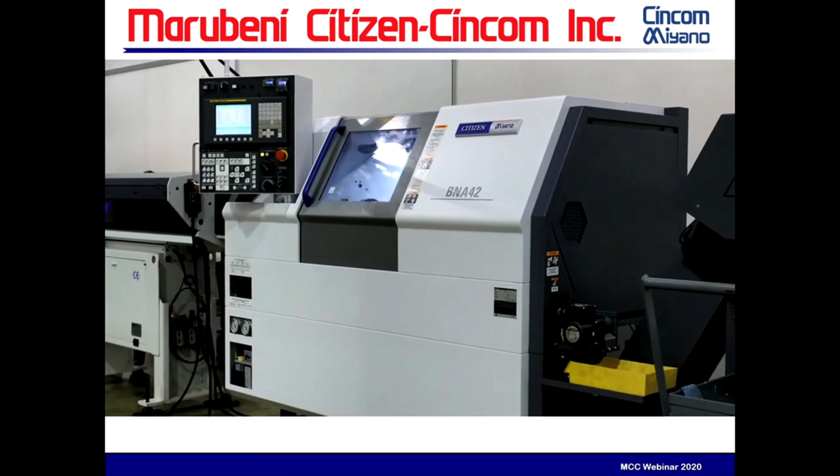This allows us to quickly have hands-on demonstrations or test cuts at various locations, and you don't need to wait for an IMTS or other trade show to see a machine in person if needed. And when you decide to buy, we can quickly deliver the machine you need so that you can start making money as quick as possible. In addition to machines available when you need them, we carry around $15 million worth of spare parts in our USA warehouses, meaning quick delivery if your machine goes down. And everyone knows a machine isn't making money if it's not making parts.

Hi, my name is Rich Miller, and I'm Regional Manager here at Marubeni Citizen-Cincom, and welcome to Tech Days. Today I'm going to be showing the BNA 42S and a little history on Miyano. Miyano was started way back in 1929 making industrial files. If you were a machinist or a skilled tradesperson back in those days, you probably had a file or 2 in your toolbox. In 1948, Miyano created the AL-S25, which was the first automatic cam-operated lathe made in Japan.

Since then, they made very reliable, accurate, heavy-duty machines to run high production. And they sold so many machines that, in fact, they were assembling the machines just down the road here in Wood Dale, Illinois. In 2010, Citizen acquired Miyano, and today it's a product that's made by Citizen alongside our Cincom Swiss machines.

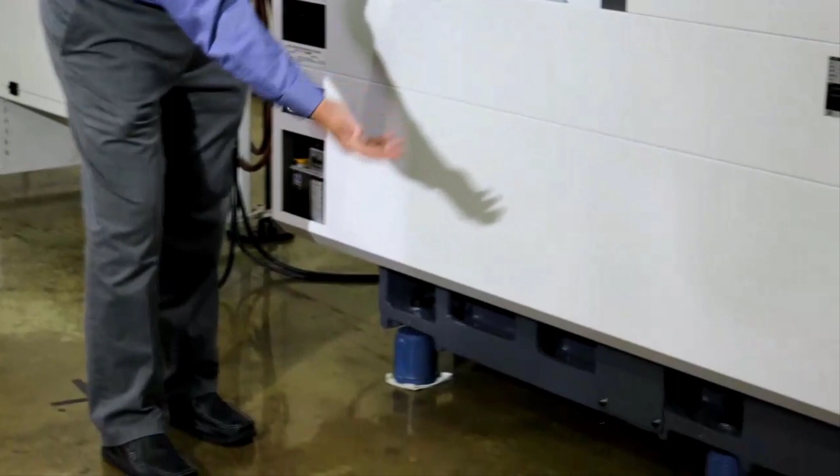This machine right here, you can see the heavy-duty casting base down at the bottom, comes all the way to the front of the machine. Most machines, you'll have a chip pan down there, coolant pan that's easy to pull out, but this has got casting all the way to the front. We have heavy duty spindles to take all that vibration from the bars whipping around. The spindles are made with double angular contact ball bearings at the front for speed and heavy duty cylindrical roller bearings at the back for rigidity.

You can bring that in now. We're going to look into the machine.

As we go over some of the features in the machine, the main spindle is a 6,000 RPM, 10 horsepower spindle with a flat nose adapter on it. The sub spindle is 5,000 RPM, 7.3 horsepower, also flat nose. We have an 8-station turret, and it has half indexing, so we have 16 total positions on the turret.

Each one of the 8 stations are 5,000 RPM, 3.7 horsepower, and 16 Newton meters of torque, which torque is what you need for heavy duty accurate cuts. The machines are box-way design, hand scraped. Miyano's been making machines that way for a long time. That way of making ways creates a machine that will stay accurate and need very little adjustment over a long period of time.

So going on to what is included with this machine, we try and do what Miyano did in the past, which was deliver a machine that has everything included so that you can get up and start running without a lot of extras that you need to purchase later on. So included with this machine, we have the parts catcher that we talked about before. This is the 4-inch parts catcher that would come up and take the part. The parts catcher drops it down to a part conveyor. That part conveyor is included.

We also include the chip conveyor, because you're going to be creating lots of chips with this as it runs continuously. We also include the 2 collet chucks. These are B42 collet chucks that are included with the machine. We also include the Patlite so that you know when your machine is running and not running. Also included is a static tool package.

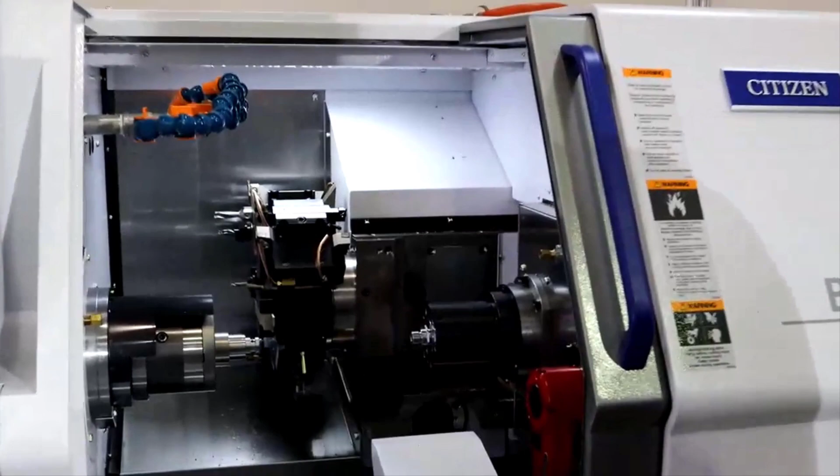So we can go back in a little bit closer to the machine. Included with this is the cutoff tool holder. And then Jinho, can you bring it down? And we include 3 of these double turning tool holders, so you can put a tool holder on the front and the back. So you get 3 of those. Plus you're going to get this knee holder. This is for the half index position. You get 2 of these included. So you can see we have 2 knee holders installed on this machine.

Bring it down 2 more stations. And so this tool holder right here is a triple drill holder. We include 1 of these in the package also. And then we also include 3 double drill holders in this package, and those are not in here. These are live tools, and unfortunately those are not included. You have to purchase those as options.

And then we also include some bushings to get you started, some drill bushings. There's also what they call filler tubes or spindle tubes that support your bar in the main spindle. There's 5 of those included also.

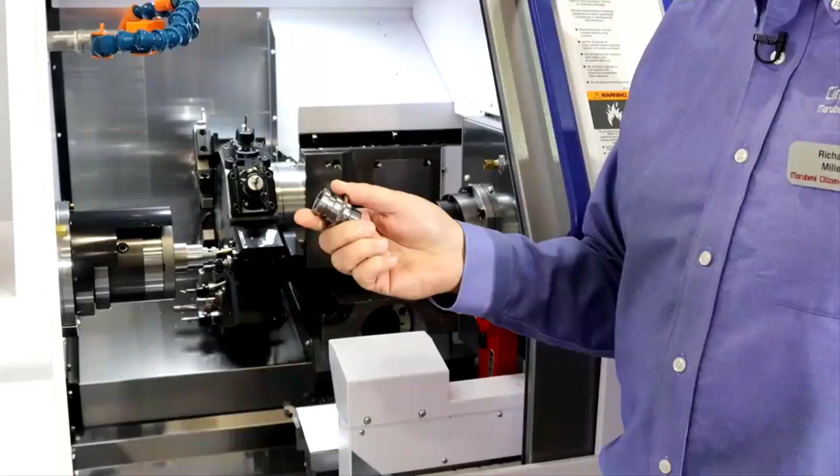The part we're making is a steel part, and what we wanted to show off today on this machine is how much this simple machine could do. So we're having 19 tools in this machine running, and we still have room for more depending on the part. So we're going to show this part running in brass so you can get a closer view of all the tools. So we can go to the tape video of the part.

So here's the BNA42S, same machine. And so here's the double live holder. We're going to index down to that position. We're doing a rough cut on the front side. You'll notice after this rough cut gets done on the main spindle, there's no index. We're just going to move right back to the back spindle. So there was no index time there. We're just right to the next cut.

Next position's coming down, another double tool holder, and this is the finish turn. Again, no index as it's going to go from this position to the front position. Finish turn on the front side. The next tool you'll see coming in here is going to be the half index holder. That's going to have a groove tool in it. Here's the groove tool finishing this.

And now another knee holder, and this one has the threading tool in it. So we're threading here. Coming back, remove all the burrs and a spring pass with the threading tool. Next up is that triple holder, going in with a 1/2 inch indexable drill on the front side.

So this is a bar loader and not just a simple bar feed unit. Bar loader means that we can stack multiple bars in here, and once it finishes one bar and retracts and takes out the remnant, it's going to drop the next bar into place in continuous operation without operator intervention. We have a lot of other bar feeds for our other machines. We have our CAV units for our Swiss machines. We also have other size Miyanos that we have other bar loaders for, and if we have really big stock, we do have some bar feed units.

If your part was a blank and you need some custom automation, we have a full automation department in New England, and they can help. All you need to do is come with your part to your distributor, and they will talk with our automation department, and they can come up with a way to load, say, if this was a blank, they'd be able to load it into the main spindle.

Or if your part was finished on the back end and you did not want them touching each other and they could have no marks, we could come up with some type of outfeed unit that was better for it. They've done lots of different automation. They also do specials on tools. We've come up with different tool holders out of our New England office to supplement our machines and get more stuff done on the machines.

MCC wants to be your one-stop shop, so when you have a machine from us, you purchase the bar feed from us. We also do high pressure units. We do mist-con units, which control the mist coming out of the machine. All of those are covered by us, and you have one person to call. You don't have to call 3 or 4 different vendors trying to get some service on your machine or your bar feed or your high pressure. You buy everything from the distributor, and it's all covered from an MCC warranty or service and support.

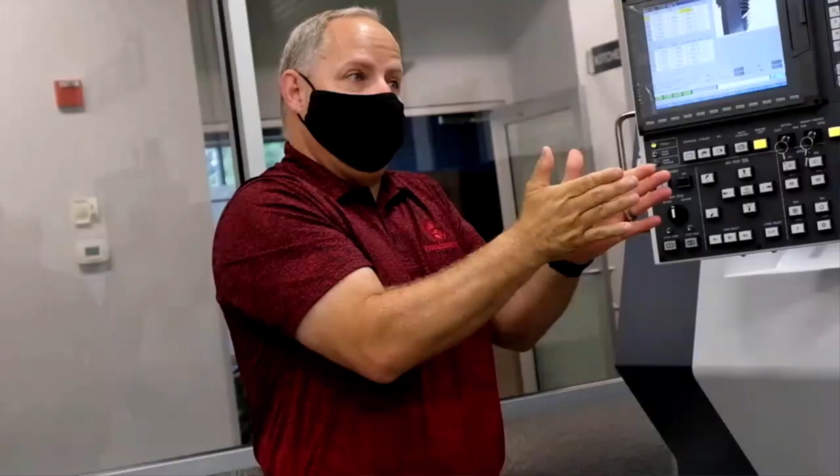But we've always had a really strong emphasis in local service. We do our absolute best to make sure the customer gets up and running as fast as possible. Our training group, we provide training almost every day for Haas-related machines. We also do on-site training for our customers as well. That's extremely important. People need to know how that machine tool works, not just what it can do.

We also have a used equipment division that will identify equipment that's old in a customer's location. We'll tag it, look it over, and in many cases, somewhere in the United States, when this goes on an auction, we'll pay much, much more than anyone ever expected they would get by just having a local auction.

We also have a group that provides tooling accessories. They are outside salespeople who are really dedicated to helping customers figure out ways to produce a part faster and better. We also do preventive maintenance. It's a lot cheaper to have your machine brought down to have it maintained on a regular basis than to have a problem and then it's down on an unscheduled basis.

Our success is really what we see in our customers' success. When people think about Productivity, hopefully they think about us as being fair. We provide excellent machine tools and services. What we also provide is quality services, integrity, and being the best we can for our customers.

The 5 gentlemen seen here are just part of our applications engineering team that is focused on turning, multitask machining, and Swiss-style turning. Combined with our staff in Cedar Rapids, Iowa, and Omaha, Nebraska, collectively they have over 150 years of experience in manufacturing. Whether you lack internal expertise, time, and manpower, want greater accountability, or just don't know where to start, outsourcing your CNC engineering project to Productivity will help you solve your toughest manufacturing challenges. They are here to help you get the best of your investment in your Cincom or Miyano machine.

All right, well, let's get to the machine here, the Miyano BNA 42 GTY. This machine is built from the ground up as a bar feed machine to handle the specific requirements of a bar feed machine. Bar feed machines need to be extremely rigid to handle vibrations that might be transferred through the bar, rotating at high RPM. And they need to be really thermally stable so that they're doing high production over long periods of time on parts that require extreme high precision.

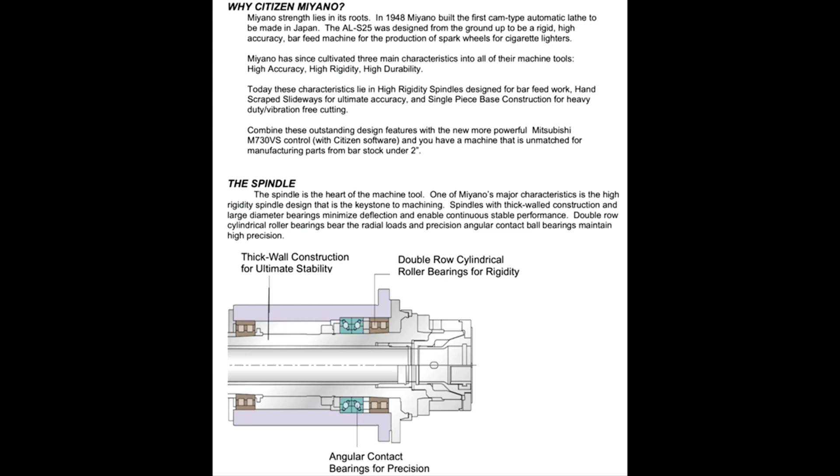Well, let's look at the bed. The bed is the foundation of the machine, and we all know the foundation has to be solid. The design on the BNA 42 GTY is single piece, heavily ribbed cast iron. This bed provides for high accuracy over many years of use. It also provides for thermal stability and vibration dampening.

Let's take a look at the slideway system on this machine. The BNA 42 GTY uses hand-scraped box way construction. Again, this gives us higher rigidity and better vibration dampening than other way type systems. A lot of competitors use roller guideways or they use ball guideways, and they just don't offer that same level of rigidity and vibration dampening. Both of those things, vibration dampening and higher rigidity, will provide much better tool life over long periods of time as well.

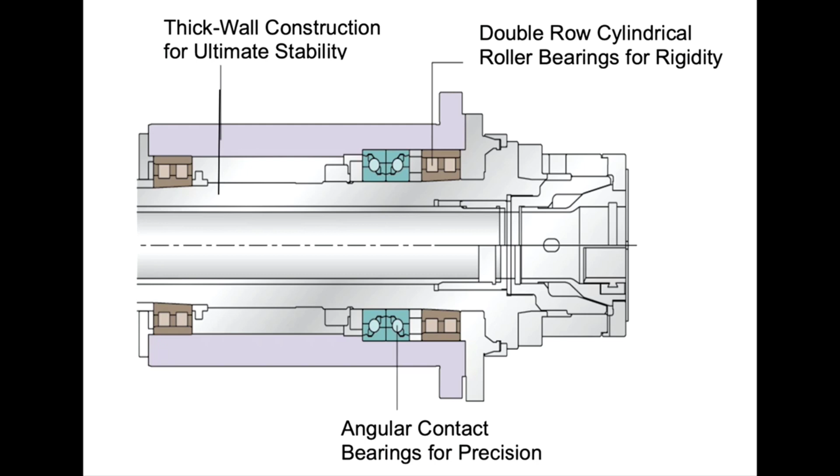Next, we'll look at the spindle. The spindle is really the heart of the machine, and the Miyano spindle design is unique and extremely well built for bar feed applications. They have double row cylindrical roller bearings in the front for rigidity, angular contact bearings for precision, and 2 sets of double row cylindrical bearings in the rear for added rigidity. The spindle also has a very thick-walled construction, which again just assists in heavy-duty cutting and vibration dampening.

This brings us to the control. The control is the Mitsubishi M730VS, and this is really the difference maker on the BNA 42 GTY. This control uses all of the technology that Citizen Cincom has developed over the years for faster setups, fewer errors by your operator, superimposition cutting where we're doing simultaneous operations, still using very easy programming technology. And so if you have not seen a demo on this control, I urge you to contact your local dealer and get a demo on this control. It really is the difference maker.

So when you put those basic design features together with the tool layout on the GTY, you come up with a machine that is simply outstanding for bar feeding work under 1 5/8". We have the gang slide that has both turning tools and live tools, which allows for pinch turning or pinch milling in conjunction with the turret.

And then you have the tools on the gang slide that face the rear, so we can be working the rear side at the same time as we're working the front side with the turret, and the turret can work both the front and the rear. So a lot of capability here, a lot of flexibility. It all comes down to just simply making your parts faster because of the overlap simultaneous operations.

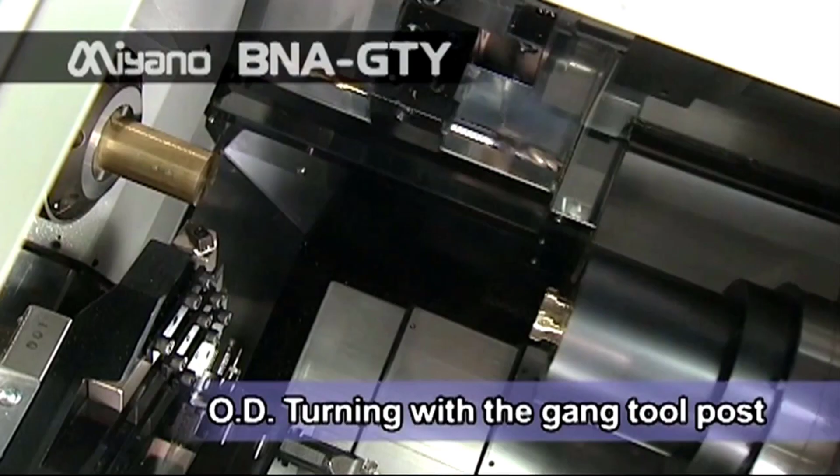I hope you're still with us, because now comes the fun part. No more words, just watching the BNA 42 GTY in action.

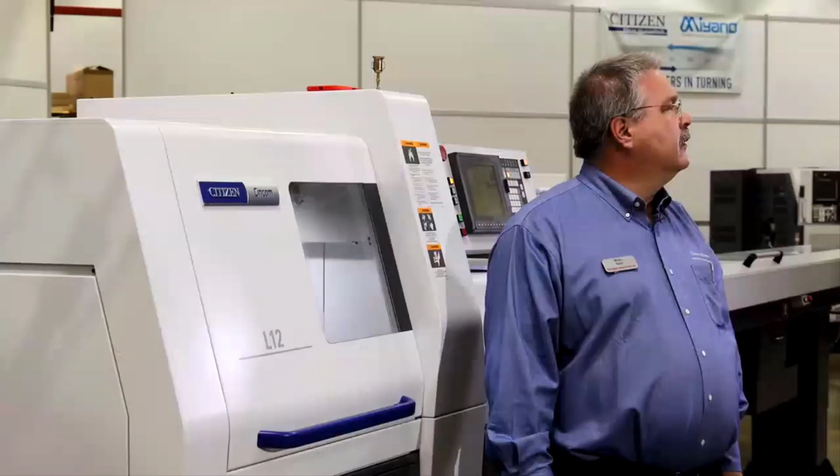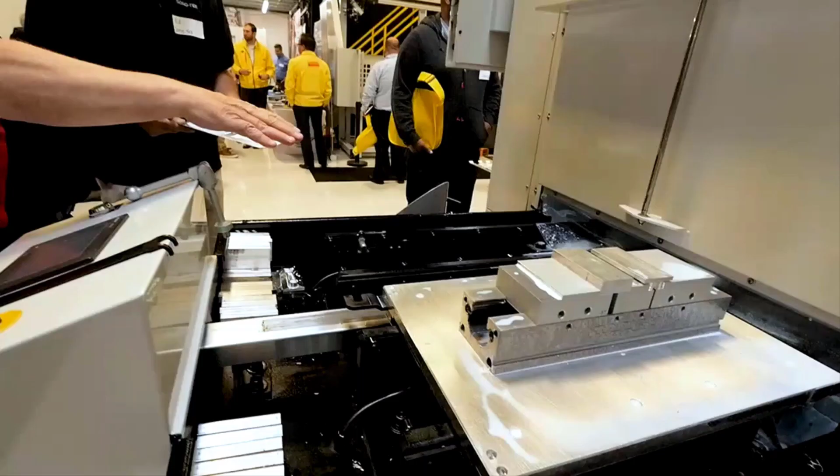We've gone from just being a machine tool distributor to being a full service company, offering our customers tooling, service, applications, training, and really just helping them find the manufacturing solutions they need to grow. Allendale as a company is looking to help our customers compete globally in the manufacturing market space. We're really trying to be the ones that support manufacturing in the United States. We're doing this by offering our customers manufacturing solutions that are going to allow them to be efficient and be competitive in that global market.

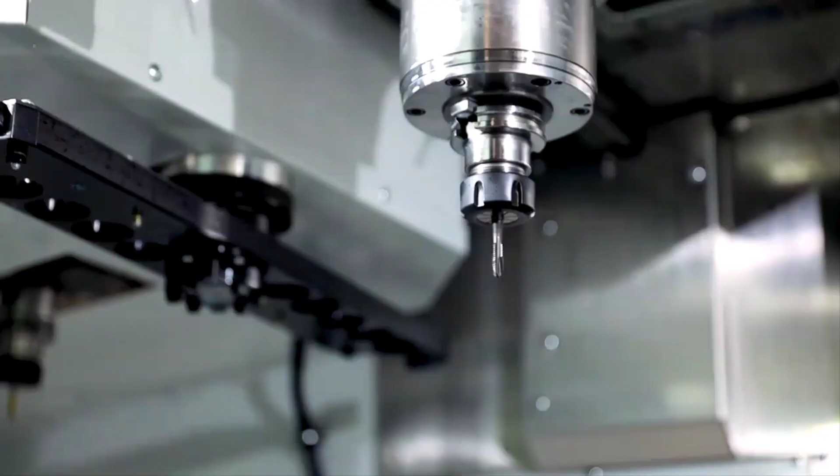Helping customers pick the right equipment, helping them maximize that equipment by giving them proper training, by having our engineers work with their people to optimize any programs or any tooling they're working with. And then in the end, keep the solutions up and running with service, being there ready with parts and the expertise needed to keep them making parts, making sure that all is up to the standards that we've set for ourselves. Our hope is that when they work with Allendale, they come to realize that we can offer some great solutions for them, and from there move forward and work with them on other projects.

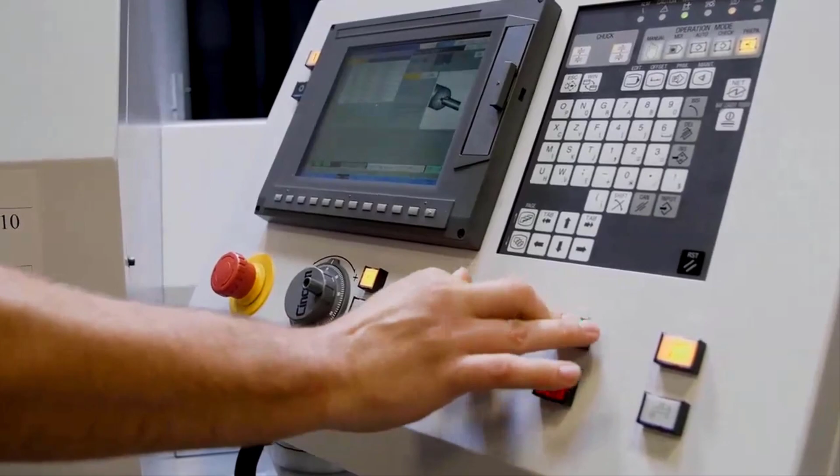This machine is a Citizen-Cincom L20, primarily used to make long and slender components, mill turn, but you can also do short components as well. It really thrives in a production type environment, high volume, short cycle time, multiple shifts a day, holding tight tolerances. This machine is typically seen in the medical field, aerospace, defense, a little bit of industrial as well. Really covers a broad span, more geared towards high volume environments where part tolerances are critical.

Allendale offers engineering support for machines like the one behind me. If you are a customer that may already have one and you need to make a part faster or with a better surface finish, or if you have parts coming in that you've never produced before, we can sit down and help program, tool up the machines, get them set up and get you running. For our medical customers, we'll even help assist with the validation and make sure the parts are up to spec and approved by the medical industry.

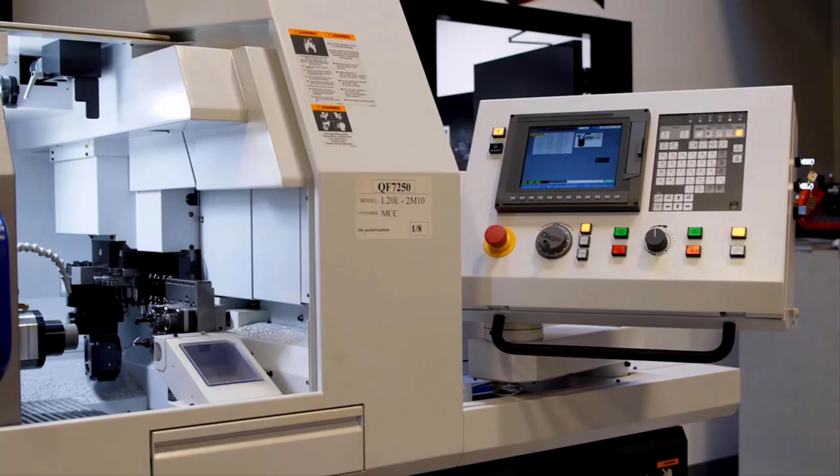Key features of this machine is it can perform multiple operations at the same time. You can do milling, you can do turning. Both sides are working at the same time, op 1 and op 2, so it really reduces the cycle time a lot. A lot of different functions can also be performed, such as gear hobbing, polygon turning. The sky is really the limit with this machine on what you can do. Extremely repeatable, quick, small work envelope, decent amount of power for the size of machine it is.

So the part that I'm running right now is a bone screw, heavy medical application. It's a long and slender part. We're running it in aluminum for this demonstration so we can run the coolant off so you can really see what's going on. Once you turn that flood coolant on, it just becomes a monsoon in there. You really can't see anything moving around. Typically bone screws come in a variety of materials ranging from titanium, cobalt chrome. All of those materials really need the coolant on. So for this demo, we were doing aluminum.

Key features on this particular setup, the primary one is the thread whirler. It allows us to cut long thread in one pass. This is important for a Swiss type machine because you shouldn't be drawing back into the guide bushing. You can only cut roughly 3/4 of an inch at a time. The thread whirler allows you to cut up to the maximum stroke of the machine in one pass. Multiple inserts spread out the load over the course of the threading operation.

I would like to give a quick overview of MCC. MCC Illinois is one of 4 MCC offices. We have one in California, Illinois, New England, and New Jersey. Altogether, MCC has about 125 employees supporting 17 distributors nationally, including Mexico and Canada. Our MCC headquarters is located in Allendale, New Jersey.

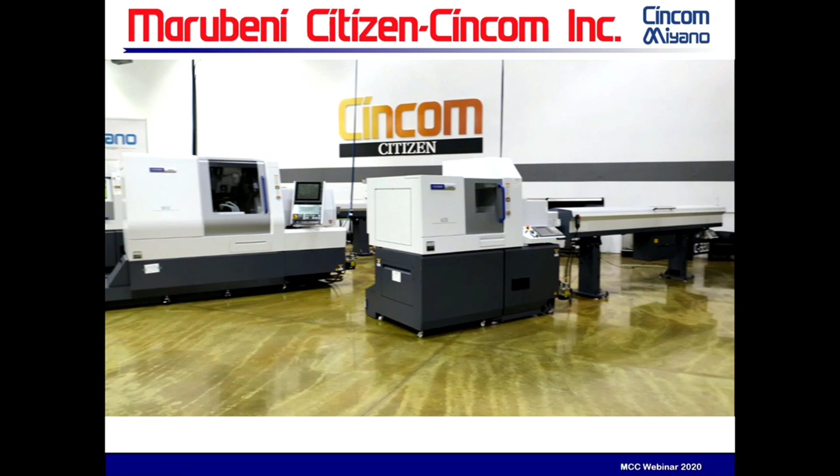We always try to have machines available in all 4 MCC regions, along with many demo machines placed across the U.S. at many of our 17 distributors' locations. We support our many distributors who support you locally. If you need a part review or a demo, please let us know. I think a quick view of our showroom will help you visualize a booth-like atmosphere, simulating IMTS. Now let's take a look at the new L12 Type 10.

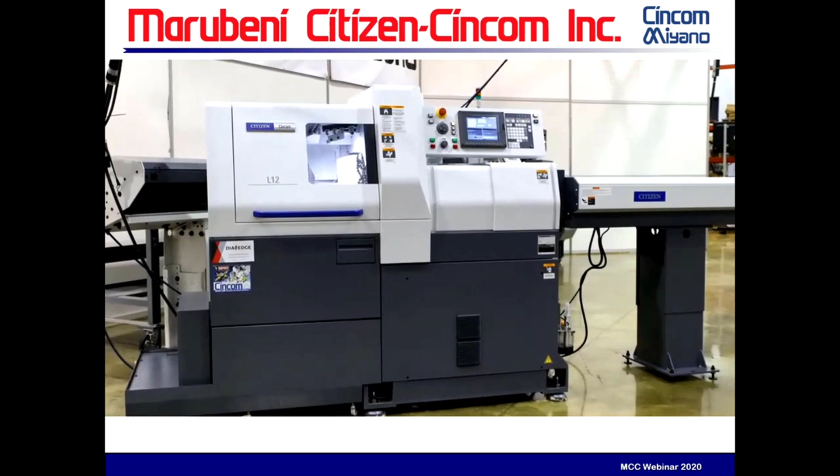And so to start, the new L12 is the latest iteration in the L series. And again, I keep reviewing this number, 1986. Here's kind of a did you know: in 1986, we introduced the first L16, the first of the L series. Through all of this time, there's many iterations of many models, 16s and 20s. We're down to 12s. We have 32s. We had 25s. And there's actually over 20,000 L-series machines produced throughout the world.

Just a good fact and a good start to this demo of the newest version L-series, the L12 Type 10. And if we start to take a look at the unit itself, the first thing you see is the new concept that Citizen gives us on most of our products, this very upswinging door, very easy access to the machine. I think all of us and all of you that already have it love this concept. We have this on our D series, we have it on our L32, and as designs come, we're trying to do this more and more as we can.

The next thing that I want to show you from the outside of the L series is down to the tank. And it's kind of strange, we're talking about a coolant tank, but you'll notice it's bigger than, say, a normal tank. And so this is, again, a new MCC standard that we're offering, the chip conveyor ready tank. Two things this gives us. So if later in life you want to add a chip conveyor, we don't need to ship you a whole new tank and replace. We can just ship you a chip conveyor, and it reduces the cost.

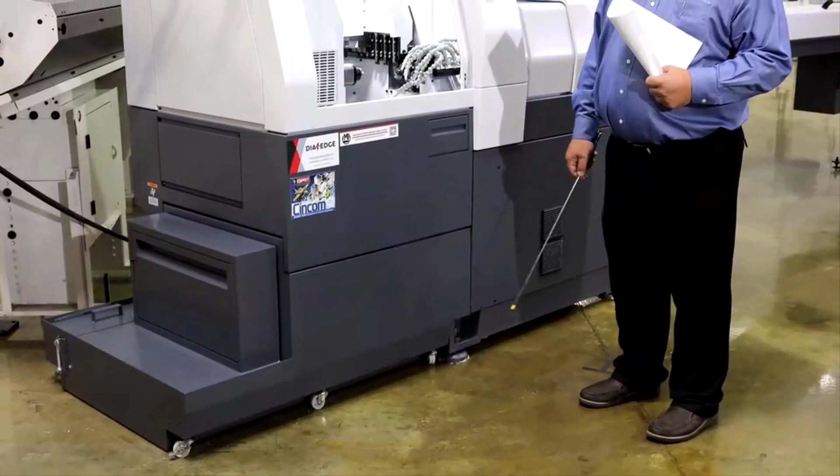But with that, this gives us an extra 14 gallons of oil. And so extra coolant gives us better time with high pressure coolant systems for air to dissipate from high pressure situations. And also it helps reduce the temperature or keep a constant temperature. So just things to notice, again, a new standard for MCC is these types of coolant tanks.

Now, if we start to go into the machine, let's review some of the internals. So first, we're just going to look into the tooling area. And actually, Brad, can you call up tool 8 and bring it up in the air, please?

I have my engineer helping me. Brad's helping us today. It's just going to give us more room. Go fast. Since the door is open, everything's a little bit slower. And I'll start now as he's moving it. Go to return position, please.

So starting off, if you know our L series at all, the L20 has all half-inch tooling, but when we went to the L12, it's all 3/8 tooling. Well, this new model, L12 Type 10, we have half-inch stick tooling, and there's 6 tools. Now, optionally, you can change this block and have 7 tools with 3/8. We opted for the larger tools and hope that you agree with us.

Another notable tool here that we're going to show you in a minute, if you can see, we have a 2 live spindle. I'm kind of contradicting myself. I just told you that the bottom row is static, but what we have is a customer wanted a special, and we made it a semi-standard now, that when we slide this tool in, it's actually gear driven by itself, and we have 2 live spindles in 1 station. We could actually have 8 face live tools here. So some interesting things about the tooling of this machine.

And if we talk about the speeds, this machine has 35 meters a minute. It's about 1,400 inches per minute. It's the fastest in the L series, so a very fast, quick little machine. The main spindle's 15,000 RPM, should be anything good that you need. The subspindle is 12,000 RPM. Our gang live tooling is 10, and our backside tools are 9,000 RPM.

Now, there's so many iterations of tooling that we want to break away for a minute and show you a presentation and show you some of this tooling. So can we go to 3, please? And so you already saw this standard tooling, but what I want to show is that, remember that the GSE block is capable of rotating 90 degrees, and that's manually adjustable.

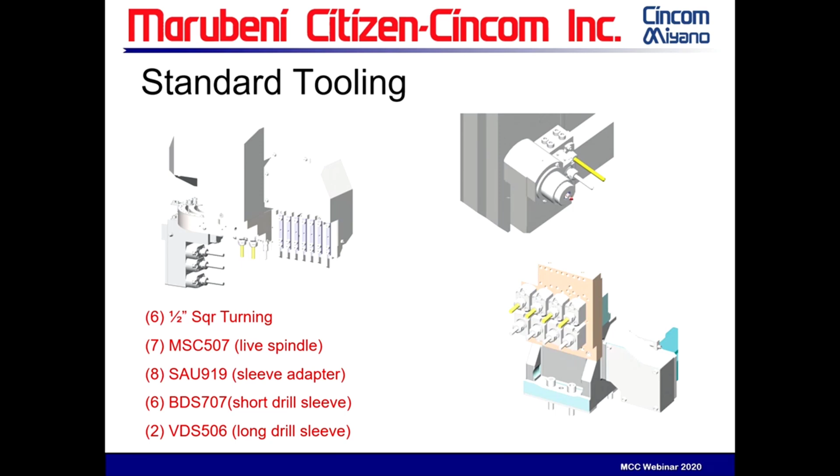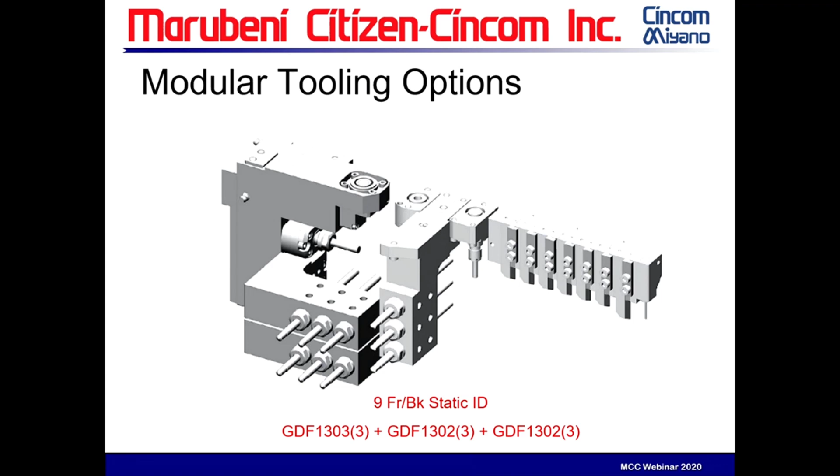Let's start to go more. What if I don't need it live? What if I need it static? So I just need a couple more static tools. I can put the one on the right, which is just a dead station of drills. If I need more than that, I can put them over on the gang plate. So here we have 9 front, 9 back, 18 static tools at your disposal. Fantastic options for future.

And so I want to go over to the tool holders themselves.

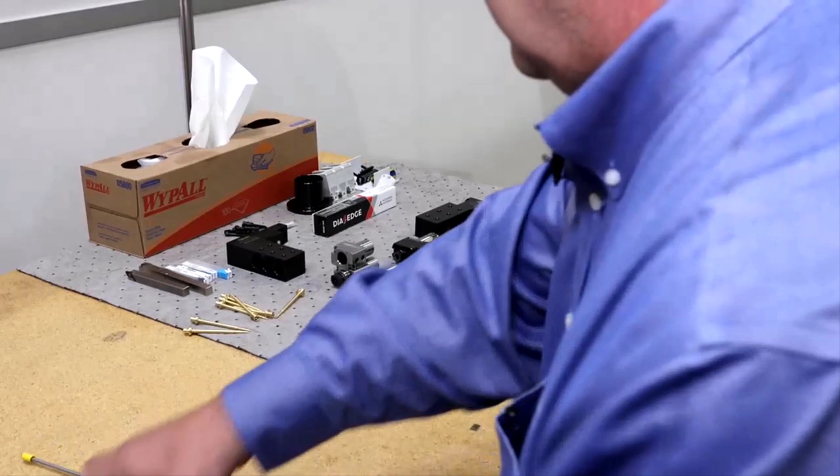And if we take a moment, I want to show you some of these tools. So first, this is a standard live spindle. And I'll wait for Todd to tell me he can see it good. See it pretty well. Okay, and so this just goes all throughout the machine, in the cross, the top cross, and in the sub spindle.

So I'm sorry that I'm moving around, but if we take that out, we can slide in its place, fits right in, a 4-time speeder. So this tool is gear driven. It's not an electric spindle, and we can get to near 30,000 RPM with this guy. They can't go the full speed ×4, but near 30,000 RPM.

It's usually good enough. Now, if we take that out, here's the one that I showed you, and sometimes seeing it in person is better than the graphic. Here we can slide out that same live tool from the top, slide this in, and now we have 2 driven spindles from one location. So interesting stuff, just for you to know.

Now, if you saw the stations on the back side for static tools, this would be what we would call standard. And again, that live spindle from the top row can come out, and this would go in its place, and that's a static tool. And what I find interesting is there's lots of customers that I visit where I see these are all modified and cut. And it appears to me that they don't understand we have other tools to offer.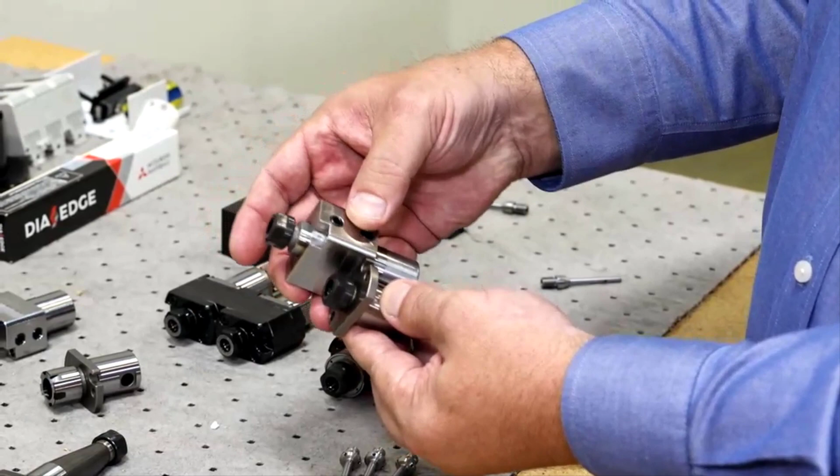Now, and that's new to the L12, this is an ER16, 10 millimeter version. And this is an ER11, 7 millimeter version. It has even shorter distance for when you're running out of space and you need longer tools. I just want to note that these are available to you. Please just ask your distributor.

And if we continue, on our front side in those T20s, attached to the sub spindle, sometimes we're really trying to use this tool and really trying to extend the sleeve, and it's starting to be a weak setup. So we have these tools that are made for short stubby tools or center drills, spot tools. And what this is going to do is just slide in and give you a nice rigid on center, perfect, without all the possible error of the extension.

So look for these sleeves. They've been available for years. Just make a note of it. Please just work with your distributor.

And then in one more case, you saw on the video that we're changing all different tool blocks. So because it's modular, again, on the main gang plate, we could take out that live spindle and put in its place this 3-position static holder. So the L12 Type 10 gets us right into the standard L series, very modular layout that can't be beat. If you need another tool, we probably can get it in there.

Now, with those tools being added like that, I want to show just a little bit more of what Cincom, what Citizen does for us with software. So here we have a face static holder. You can see it's in place. And so now if you're a beginner programmer, a beginner setup person, on most other machines, when you call up a tool, you have to know everything. Citizen knows this tool's installed. And so it's actually going to go down on the lower right, go across the whole gang plate, and come up in between these tools for you. You're just going to say T1100, and this motion's going to be automatically had.

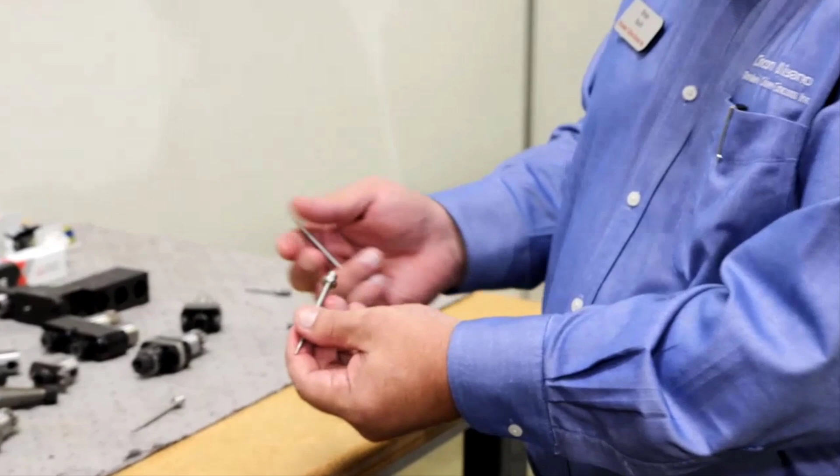And so I want to make sure that we're going here. We are. And so what we wanted to show today was a good L12 part, a 1/2-inch part. It is 1/2-inch stainless steel with a long turn. Some of you may recognize what this part is. We changed it a little bit and added some features.

If we could zoom in on this angled hole, and I'll wait a moment here while you do. I'll try to hold it steady. And so we have 3 face angled holes, and they are spotted, that if I flip the part around, we have 3 holes that meet these by phasing. We also have a keyway slot done through the Y2 axis on the subspindle side.

And then we also have, using that high-speed spindle, a 30 thousandths face hole. I'll hold here for a second and see if Todd can show that. Pretty good. And we come around and that intersects with the hole here. And so another feature, not even new anymore, great technology of Citizen is LFV technology, the ability to break chips. So we're going to go to a video.

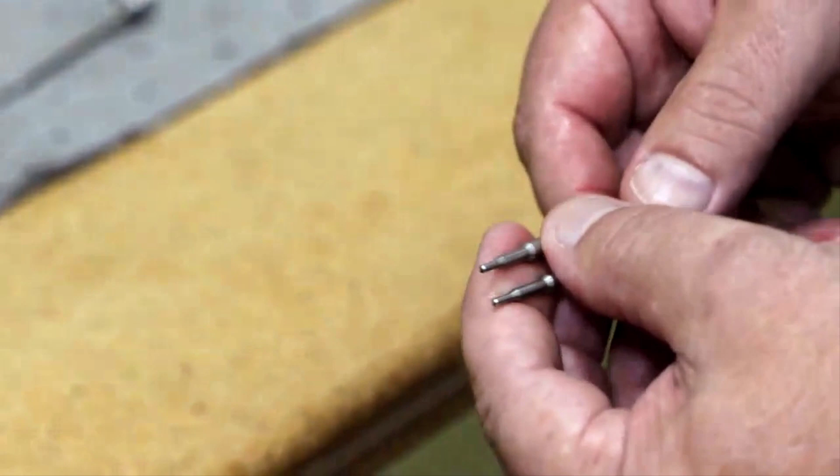This is so hard to see in the machine with the coolant. We elected to run the part out of actually brass, and you're going to see it run in a video, and I'll explain it as we go. So we were excited to run this part. It's always fun to watch LFV go. So LFV, even on the subspindle side, we do. The first pass here is actually without LFV. You'll see some larger chips.

I'll wait for this one. Here we go. That's without LFV. Then we turn on LFV, and you can see the perfect length chip. We can control that by program. And so we can change the length of the chip to whatever we want. We don't necessarily want it too tight, too small. Here we're utilizing that tool holder we showed you, the tandem tool.

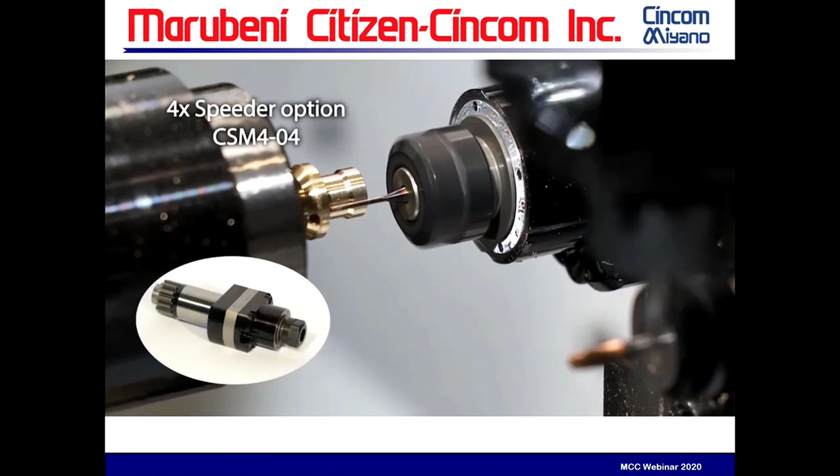And so we didn't actually need this tool for this job, but we wanted to show you. Here's that 30 thousandths hole. We're running at about 12 or 14,000 RPM. And here we have a 90-degree milling head, Y2 axis. So we have a full 3-axis, actually 4-axis with C milling of whatever you want to do. We did the keyway slot.

Now here's LFV, and maybe it's not so impressive in brass, anybody can cut brass. So we did it in stainless the best we could and showed it the best we could. And if you look on the left, this is the exact same feed and the same cut, LFV on, LFV off. You can see this long, unmanageable chip, and you'll see it even get longer there. And on the right side, there's no chips. So LFV chip breaking technology, it's just fantastic. It just works.

Here we have the GSE block. Again, we have it mounted at 50 degrees. And now we're coming in with our drilling station. But also remember, we could put high-speed spindles here. And we have G codes that make that easy to program. You just pretend it's a Z axis and G83. Subspindle phasing for alignment front to back. And a straightforward little quick demo that was about 1 minute and 50 seconds out of stainless steel.

And we're going to go to camera 1, and Brad is going to show us some of the chips that LFV actually did. So if you look on the left side, these long stringers are the ones you saw on the video. When you're doing that heavy of a cut, you're not going 5 thou, 8 thou per rev. So I think we're at 1.5 thou per rev, no, 1 thou per rev. And if you look on the right side, this is LFV. It just works. And we can control that to whatever we want. So the entire cut was controlled to that type of chip.

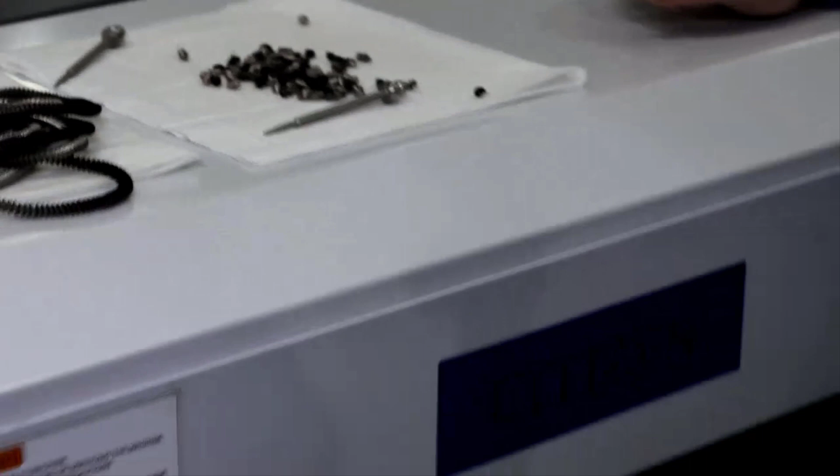And so we could spend an entire presentation, an hour, on LFV. And our goal is just to introduce it to you here. So please work with your distributor, look online. We have YouTube videos everywhere. Just search LFV and get a little bit more acclimated to this technology.

And so now, as we talk about a part and all the different tooling and the features of the machine, we really got to talk a little bit about the control. So Brad, can you show us a little bit of machining data?

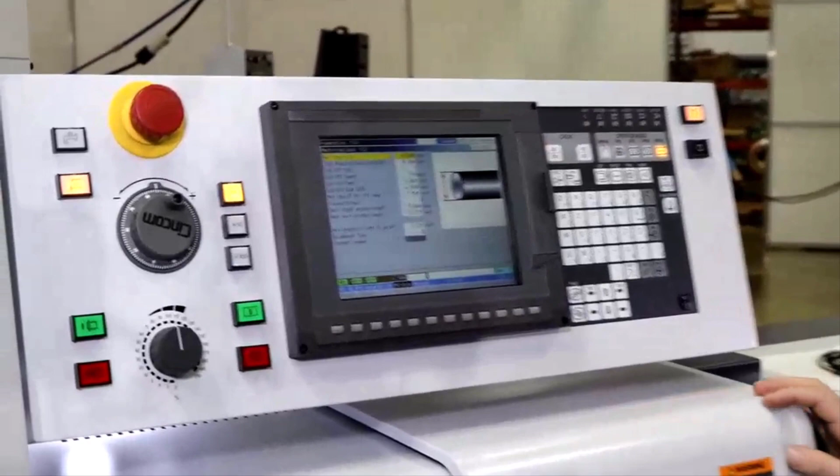And so actually, I'm going to keep throwing these numbers around. 1986 with that first L series. And as I speak, if you just go up and down and show some of the screens. 1986 with that first L, Citizen, this was a breakout year for Citizen.

Basically, the way that I explain it is all of our design engineers got into a group and said, what can we do to make the next new concept machine? And the manager said, throw away all your notebooks, throw away all your papers, we're going to start from scratch. And what they came up with was the addition of machining data.

What they found out is 70% of all crashes at the time that they did a study, and I would say USA was the same, 70% of all crashes happened when the machine was not running. It's when man was involved. We changed a tool, we set a tool, we cut off, getting the machine ready to run.

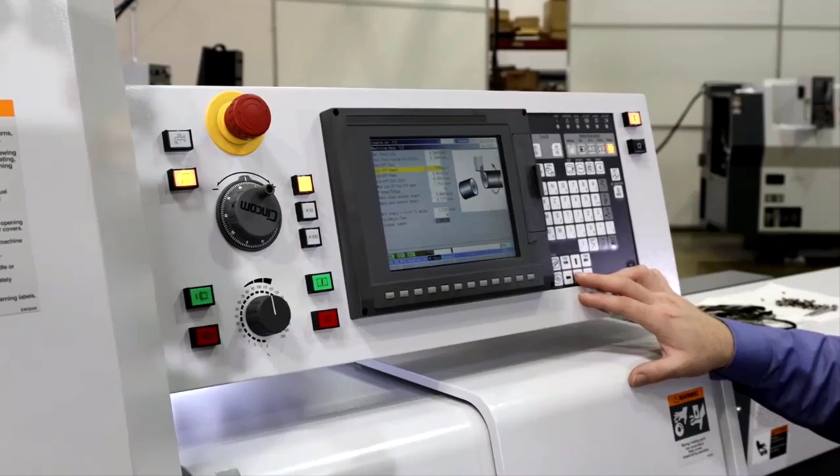And so a part of Cincom control, its machining data, is along with preparation. And so we can just push a button and the machine will move to a cutoff motion, and it will close the collet, turn on the spindle, and cut it off. And so since all this information is known, it's remembered. When you send out a program and bring it back in, it's a part of the program.

So not only the stock size and the position point, but let's actually show the non-guide bushing. A feature that I didn't explain yet is that this machine is capable of guide bushing or non-guide bushing. And if we take a peek inside, if Brad was to set that, we have the ability to utilize this machine in non-guide bushing mode.

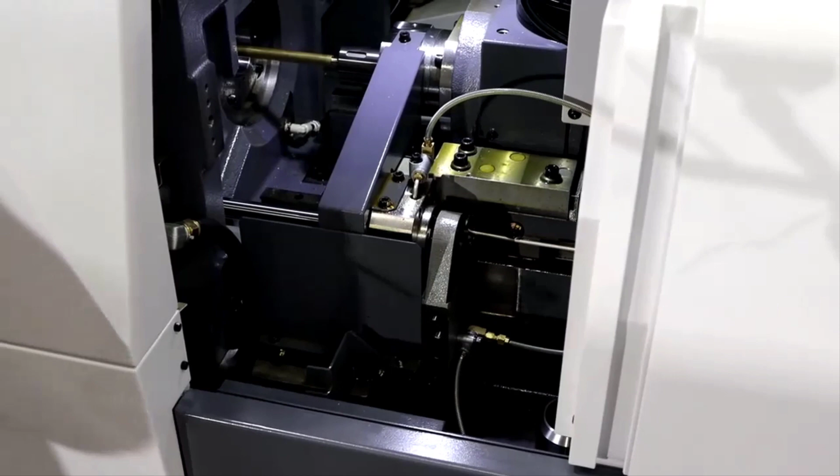And it's pretty straightforward that this is a cover that's covering a belt that's driving our spindle that comes through and drives the guide bushing. We have a very easy way. It takes about 15 minutes, probably less to undo, 15 minutes to put back. And this will actually slide up and it'll store right here. You can see the bolt location.

And so we don't have to take parts out of the machine, we just disengage them and move them into storage locations. Once that drive device for the guide bushing is off, we install this new spindle cap that comes standard with the machine. And you can see it's got a nice surface. This is just like a quill. There's a plastic or sealed surface that this slides on so the coolant and chips don't come back.

But once we choose what Brad showed in machining data, this will allow for this spindle to go all the way forward and get to the cutting tools. And so in doing that, we can run this Swiss machine that's always guide bushing in non-guide bushing mode. Some people call it chucker mode. We're really not a chucker, we're a bar machine. So I typically say non-guide bushing mode.

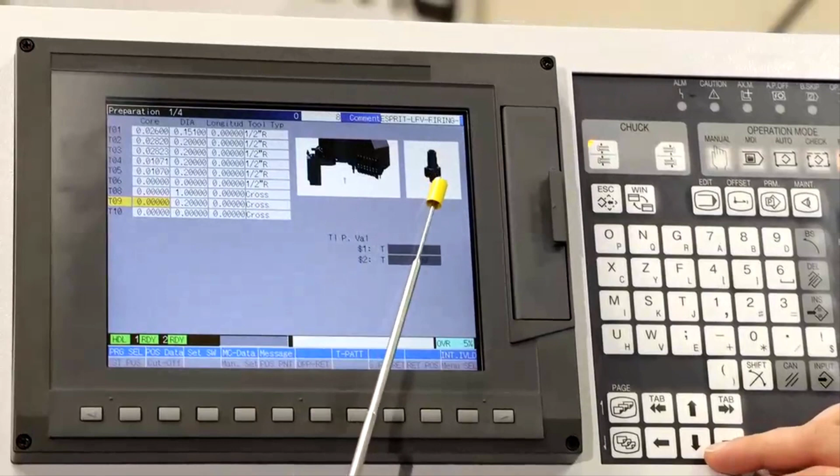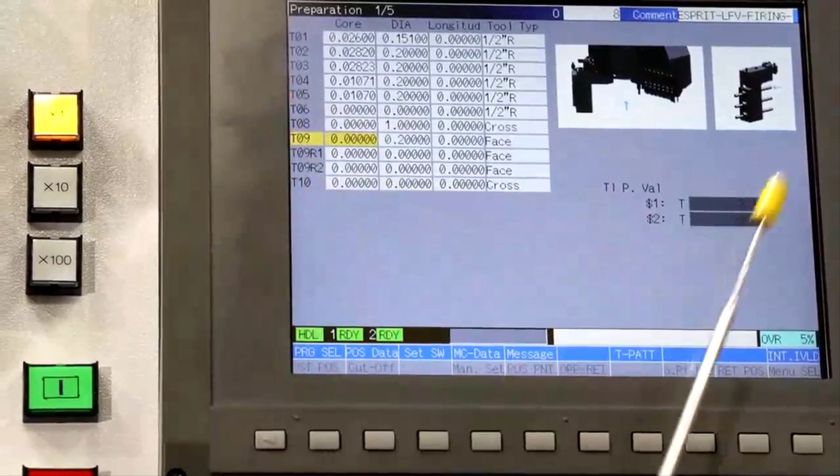So now let's go to machining data, and we're going to change that and say that we have a 3-face static tool in, would be a number 3. And so now the machine knows that it's a different tool block. If we go back to preparation, which is how we can see how the machine's running, you'll see now we have 3 number 9s. We have a 9, a 9R1, and a 9R2. And as he iterates through those, you'll see a little arrow here, just R1, yeah.

And so it's a very visual control, we call Cincom control. It only has more tools when you need them. Most of our competitors, when they put a tool block like this in, all they have is tool 9. And they have to use special offsets that they have to figure to get to the next tool. For us, it's made by Citizen, designed by Citizen, it fits in, and we run. And so Cincom control. You can change that back so we don't mess up our setup, please.

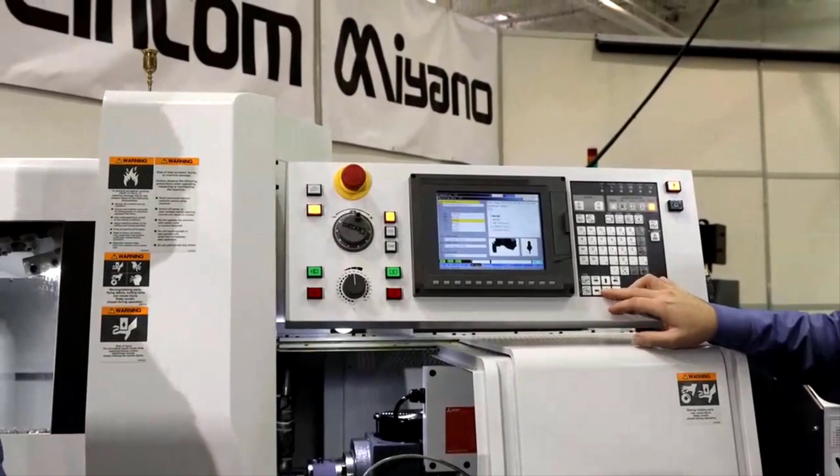And I want to talk a little bit more about Cincom control, and I have, again, another little video for what we call on-machine program check. Now I have to jump ahead here, but again, since we chose those tools in the system, it knows, and it's able to overcome these special tools.

And so Cincom control gives us many things. This specific model has a Mitsubishi M70, very fast, high-speed macro. Standard, we can run from the CF card through sub-programs. And it's the staple in the market, Cincom control.

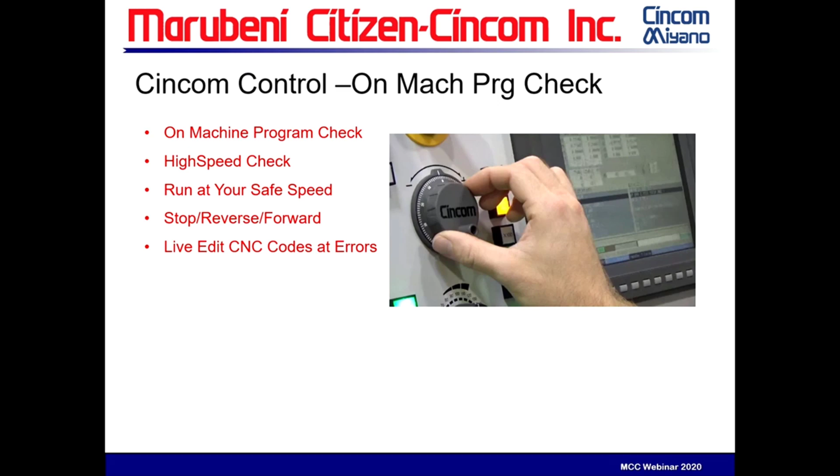Well, if we look at other features, we have on-machine program check. This is a feature that's similar to versions all the way back to 1986. And as the years went on, it got better and better. The hand wheel dial came out around the time of the B12, and this was right around 88 or 90. And so let's take a look at on-machine program check.

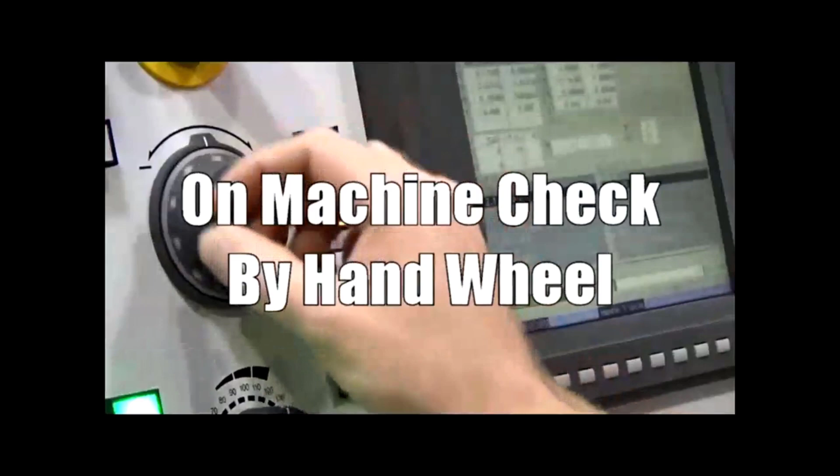Oh, I'm done. You have more? Harvey. How long is this? Short.

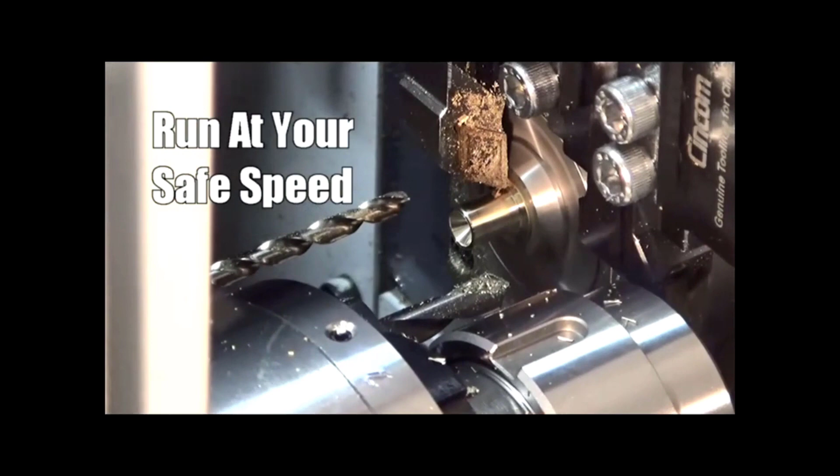This is all that the operator decides to control. Get to a spot that doesn't look proper, you can actually reverse. You can actually edit code. Maybe you've got an error here. Edit code, continue. Very important feature on the program check. So our fantastic feature, on-machine program check.

Before we move on, we're going to talk about the bar feed a little. I'm told there are a couple questions, and I'll try to answer them. The first question is, is there coolant through on the turning tool block like there is on the M series, M32, and the D25 has this also, but the L12 Type 10 at this time does not have coolant through built into the tool block. There are stick tools we can use and quick change for some, but not built into the Citizen tool block. It was too tight of a space at this time.

So the second question here is, is there any cycle time change if we use LFV or without LFV? The actual answer is no. LFV is staying at the same feed rate, but the tool is moving off and coming back at a very specific rate to keep the standard feed rate. But sometimes LFV could have us slow down the feed for the cut we're doing because we're doing it in one pass instead of rough and finish.

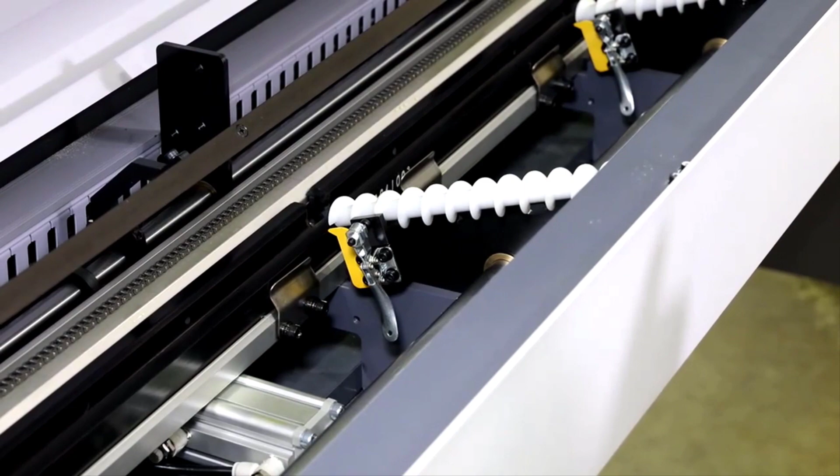And so anytime that we're trying to feed small stock, it's easy once the bar is in the channel, but it's getting the bar stock from the outside surface into the channel that's the difficulty. So in this case, we're running 6-foot bars. So if we can come maybe in this area to show. And so of course these would be longer, but just to demonstrate the screw working, anytime we exercise it, it only goes 1 revolution. So go ahead and bring it up a little.

We purposely have these empty so you can see the bar load in a minute. And so when we're loading this, we're just going to put 1 bar in and cycle down 1. Put 1 bar in and cycle down 1. And always when the bar drops in, only 1 bar can make it. So the screw type is very good for small bar, 1 millimeter to 16 millimeter.

So as we continue, this also has quick change channels. So I don't know, can you get yourself on? I can do it here if it's easier. So these are just pressure plates. So this channel is changed just by popping it out and putting another one in. We give you 2 channels standard on all of our CAV product. And so it's about a 15-minute changeover to go between different channel sizes.

If we continue, this type of bar feed, since it's built by us for us, it's run by the control. The control itself does the axis and all I/O. And so when we make settings, we do it automatically from, again, that machining data area. It knows the part length, and knowing that, it knows how to set itself up. So it's all built in. And if you want to change things for special applications, you actually can.

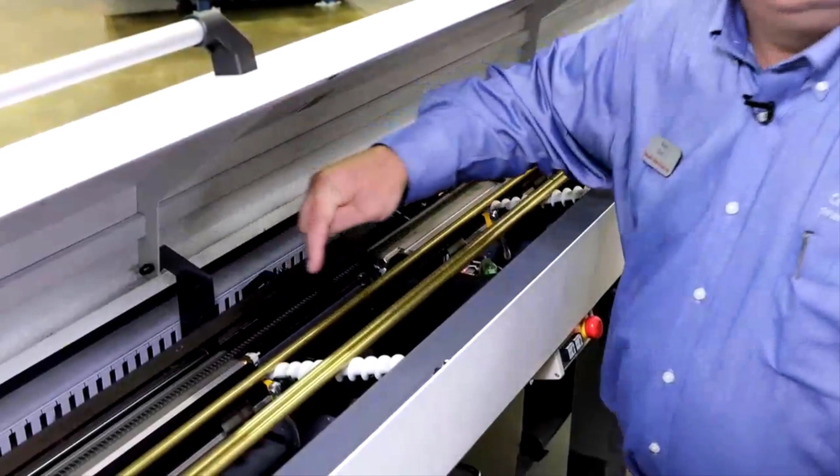And actually, to make this the best that you can see, we'd like to give you a demo of just a bar load. So Brad, if you could get ready, and don't do it yet, we'll make sure the cameraman can get in. And so if you could, Todd, all the action that's going to happen is going to be in this area, and it's going to be right here. And so Brad's going to execute a bar change, and you can see one bar feed process. Go ahead, Brad. Yeah, I had the doors open, I'm sorry. So the CAV 12 LS-IS, screw type bar feed, 1 millimeter to 16 millimeter.

Well, this kind of stuff always happens when you're live. Let's give it 1 second here. And as we go, we're going to run one cycle of the bar feed. When you end up doing this, you have the doors open, so we just have to overcome our door issue. There we go. Here we don't go. Okay. We're trying to do that and we don't have a piece of bar in there. So we're gonna skip the bar load. Sorry for the confusion here.

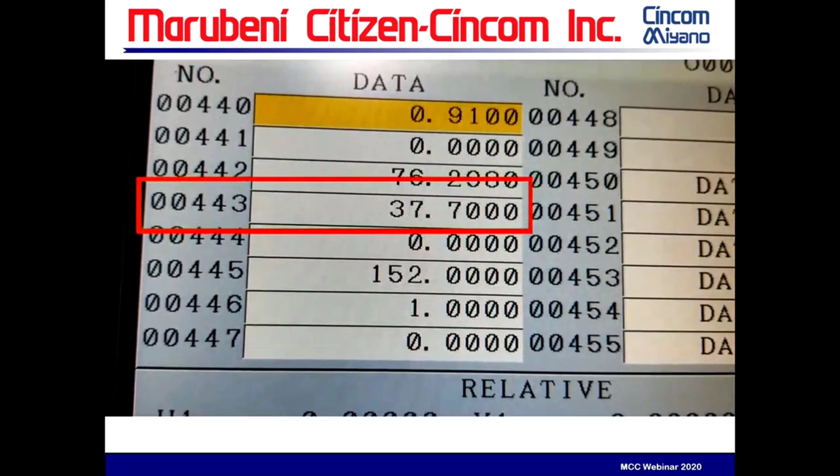Now with this type of information being sent through the program, if the operator or the setup person forgets to send the bar loader info, the information will be sent by program. We are also working on having this information of parts remaining and pusher positioning showing up on our operator screen.

Another new feature that we'd like to add to our bar loaders is last bar sensor. So if the lid is closed and the machine is in automatic and the last bar is loaded into the channel, now with the lid still being closed, we have a warning light blinking that states that there are no more bars left in the bar loader.